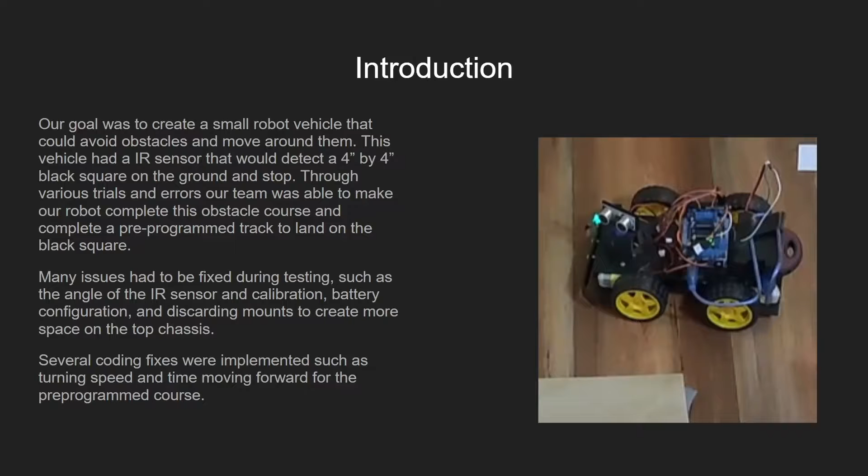Previous designs. These designs were made by Lawrence and illustrated by some of the visions our group had discussed in the beginning. One of the main questions we had was how many wheels would be enough. Not just how many wheels, but how many motors to drive them. For some reason, we decided on having 4 motors moving 4 wheels independently.

Our thinking was that 4 wheels would be better for moving the vehicle over the ramps. The design was pretty much the same as our final, in that it involved a lower and upper chassis with the electronics mounted on top. Later, a bumper pressure switch was added because through testing, the ultrasonic sensor seemed to not have a good field of view to measure.

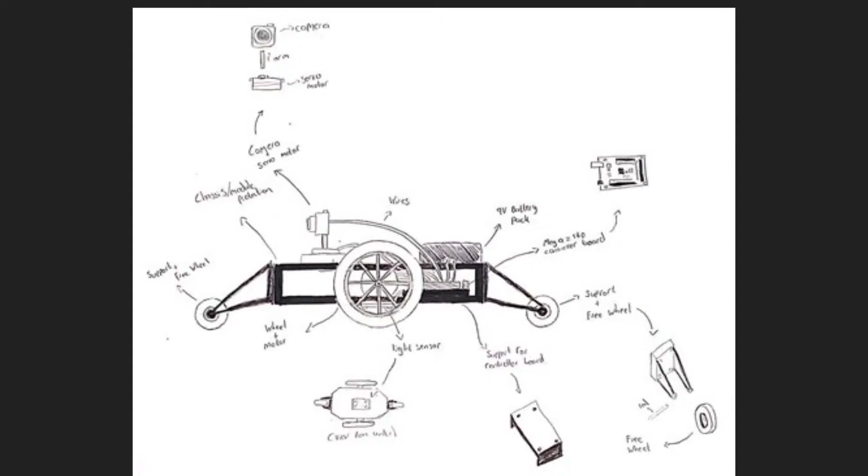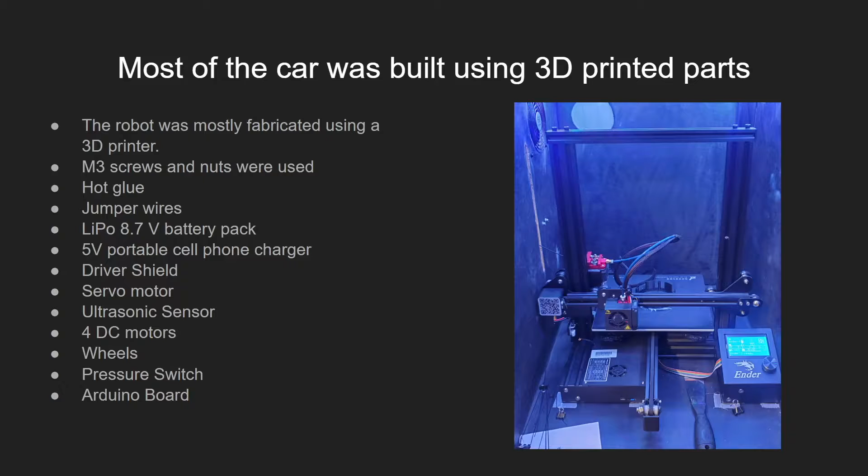Manufacturing plan. Our manufacturing was mostly done via 3D printing. We also used a lot of M3 screws, nuts, hot glue, jumper wires, a LiPo 8.7 volt battery pack, a 5 volt portable cell phone charger, a driver shield, a servo motor, an ultrasonic sensor, 4 DC motors, 4 wheels, a pressure switch, and of course the Arduino board.

SolidWorks renderings. In the beginning of the design process for the actual vehicle, the bottom chassis was made first. This would mount the wheels and the IR sensor would go in the front hole.

Although later during testing we discovered that our IR sensor needed to be placed in the very front of the vehicle, probably due to the fact that there was so little light that it couldn't detect the black square or detect when it wasn't on the black square.

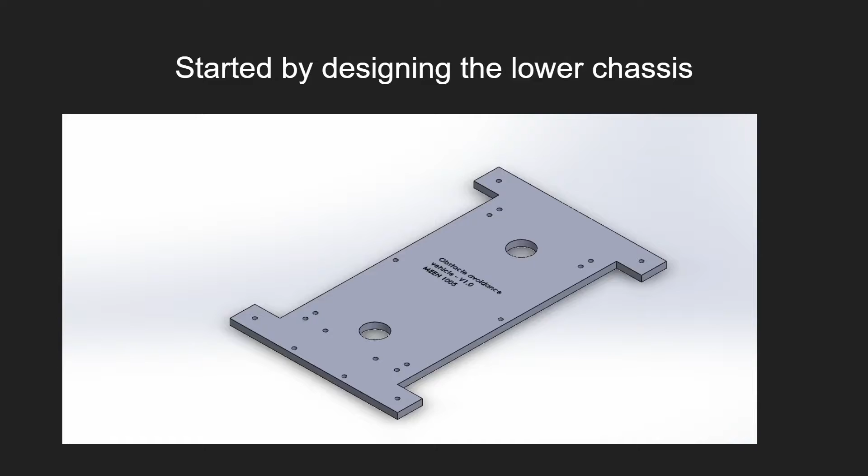Some components like the DC motors and the pressure sensor were quickly built in SolidWorks to help with the scaling of the model. Later, the pressure sensor switch was engineered, printed, and mounted.

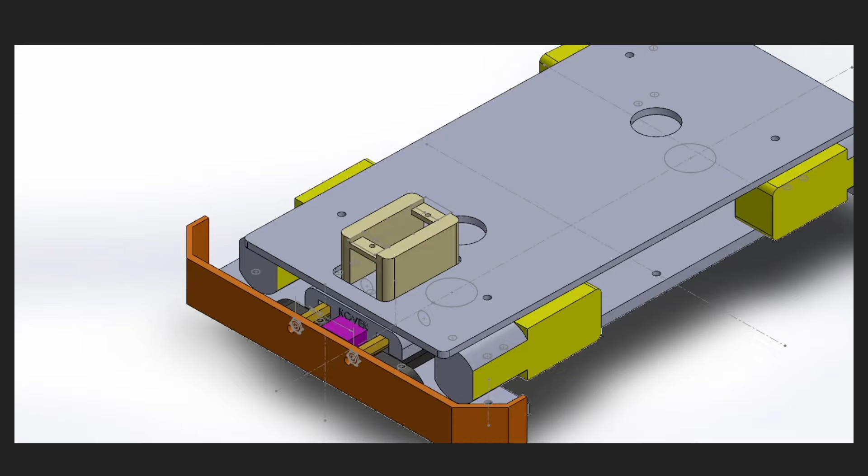The final step was to make the upper chassis and add component mounts. The servo motor fits snugly in the tan-colored mount on top of the chassis. Here's another rendering of the pressure switch mount.

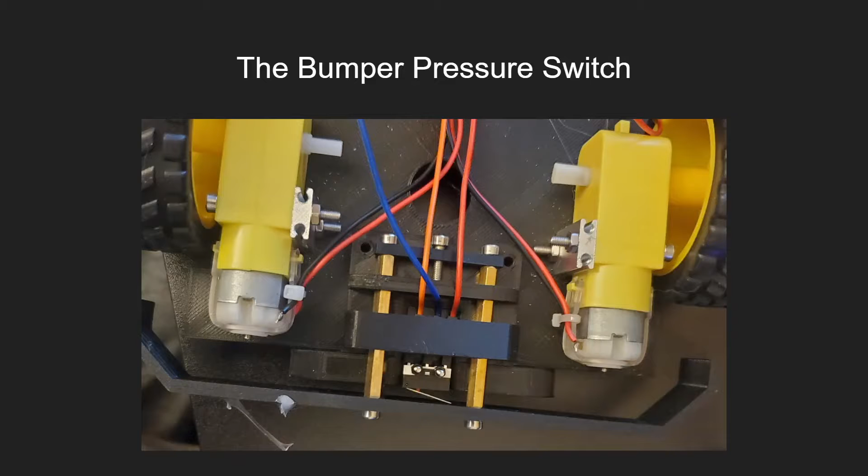Methods and design process. Here's a picture of the printed out pressure switch mount. It is a simple design which utilizes brass hexagon spacers threaded at 3 mm on each end. Those are attached to the front bumper, then screwed into a back plate.

This backplate is attached to an adjustable screw, just in case more room was needed between the front bumper and the pressure switch. The goal was to create a bumper that would push the switch at any time when running into any sized object at any angle.

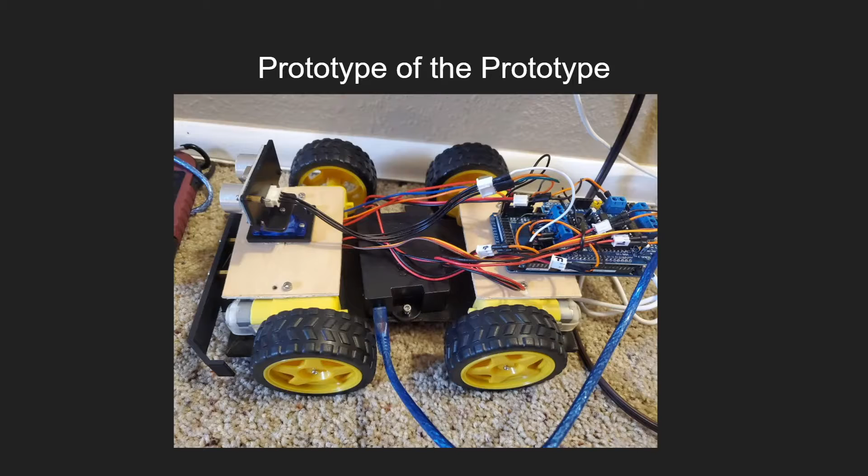The prototype phase had everything complete except for the top chassis. This helped with the wiring and also helped us discover the battery issues. We will cover these in a later slide.

For the top, we used balsa wood as a temporary top chassis and mounting bracket for the servo and the ultrasonic sensor.

To code the robot, each individual component was programmed separately. This allowed an understanding of how each program would work together with one another. The first component to be programmed was the DC motors. An individual program was written to make the motors move forward for a set time. Then we made a program to move backwards, move left, move right, and stop completely.

Next, the ultrasonic sensors and servo motors were programmed together. The serial monitor was utilized a lot for this. The rest of the components were later programmed, such as the pressure sensor and the IR sensor. Again, serial monitor was very helpful for this.

As stated before, there were many issues with the batteries. First, our driver shield seemed to be drawing a lot of current. When the Arduino board was plugged into the computer and the 8.7 volt battery plugged into the shield, the program ran perfectly and did exactly what was expected. When the Arduino board was unplugged from power, nothing happened. This led us to believe the Arduino board needed an extra power supply in order to work.

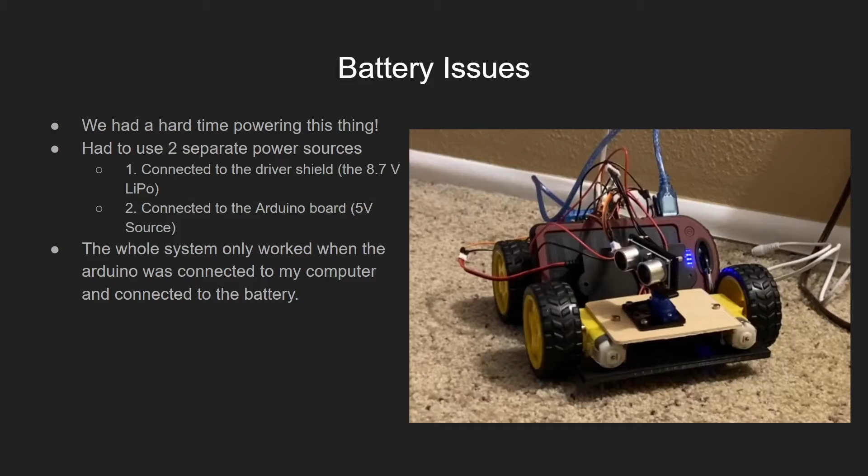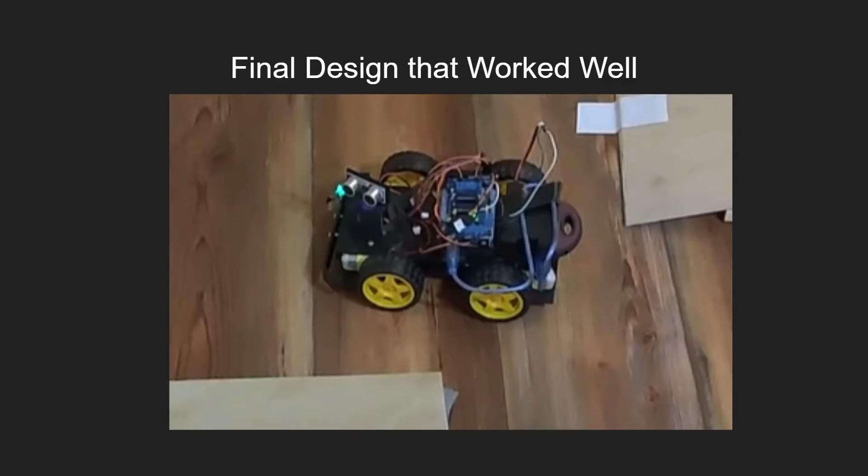Here is a photo of our final design. You can see on the back we have the cell phone battery, then the LiPo hobby battery, then the driver shield, and under the Arduino board. The ultrasonic sensor attached to the servo in front, and the pressure sensor bumper.

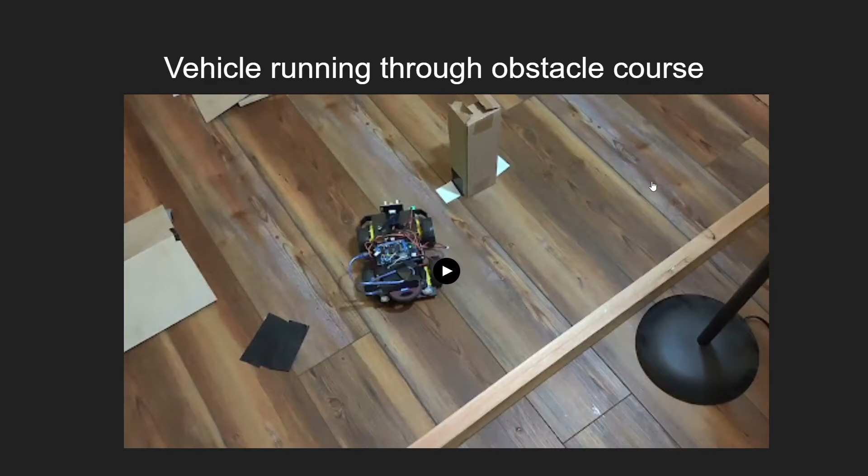Here's a video of our vehicle running through the obstacle course. This was after a lot of testing, so the ultrasonic sensor didn't scan all the time, it seemed, and we had to rely on the pressure sensor switch to be pushed. And sometimes it wouldn't even push it all the way. However, it did seem to do a good job in doing the left and right distance comparison and then choosing which direction to move into.

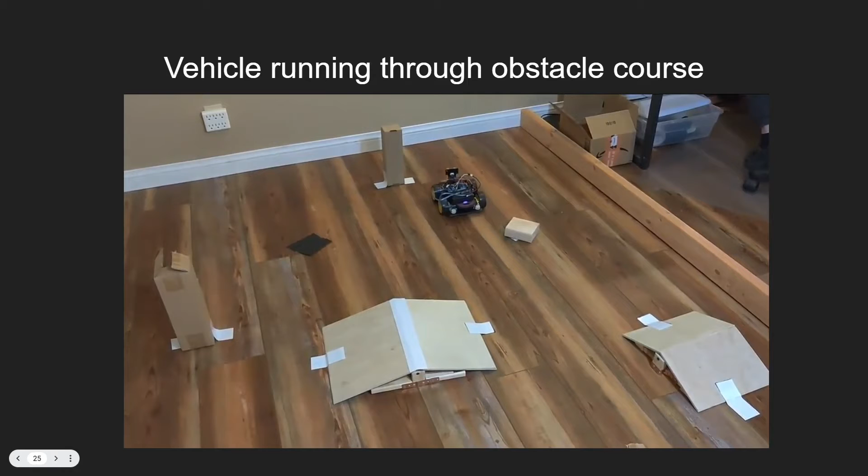It seemed to go over ramps pretty well. You can also see the green light. That green light is the IR sensor. As we discussed, it had to be attached to the front of the bumper because it just didn't work underneath the vehicle.

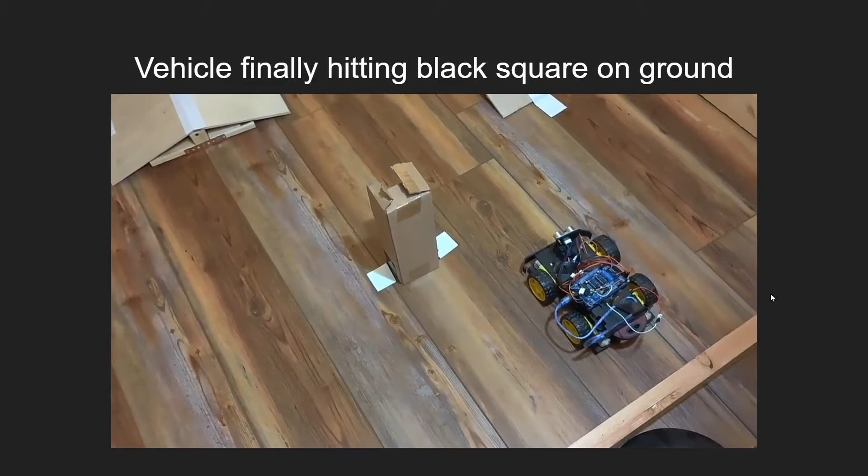Here's a video of the vehicle finally hitting a black square after several tests. It was getting pretty late into the night, so we were really hoping for it to eventually hit.

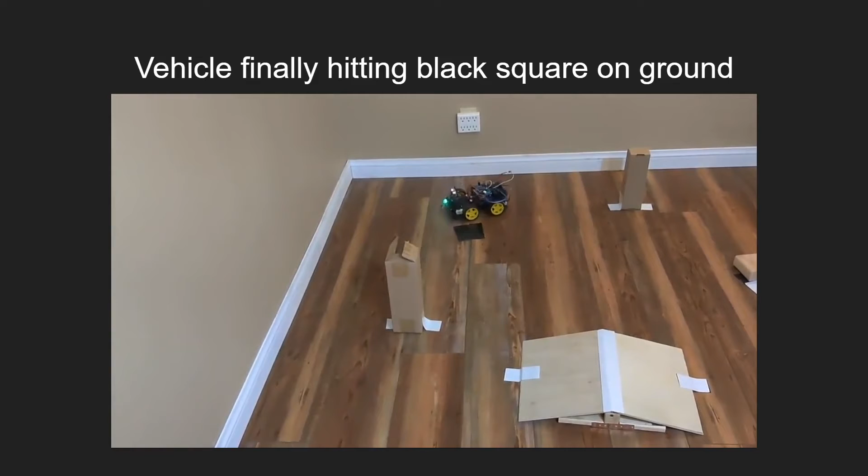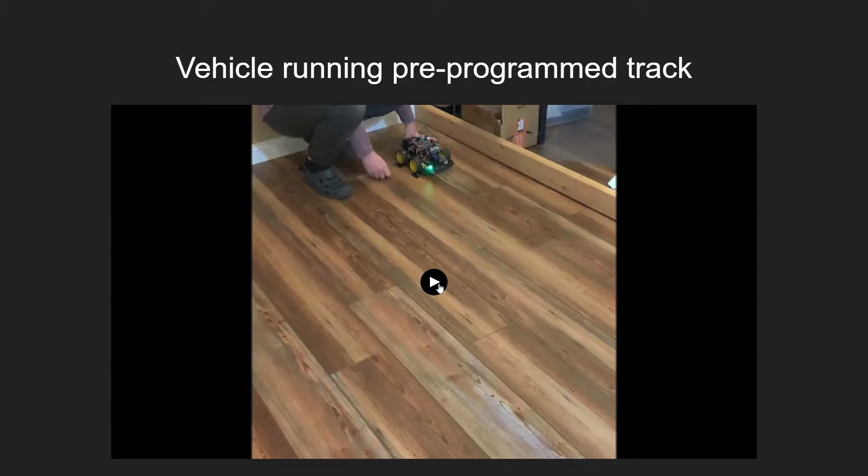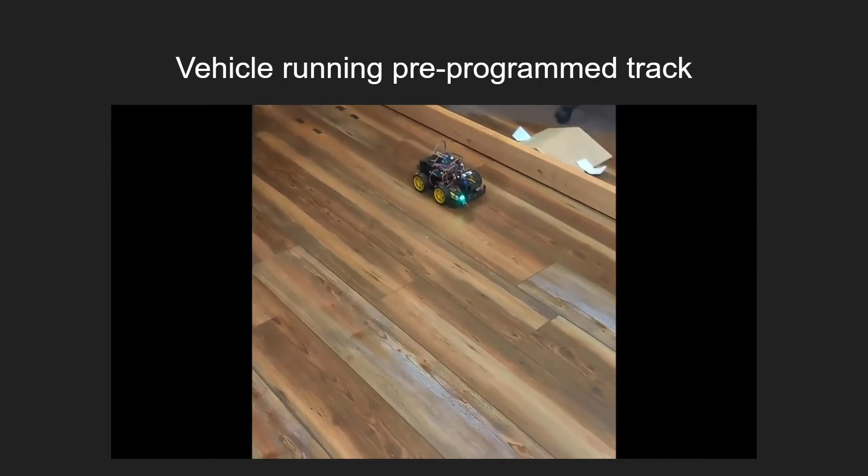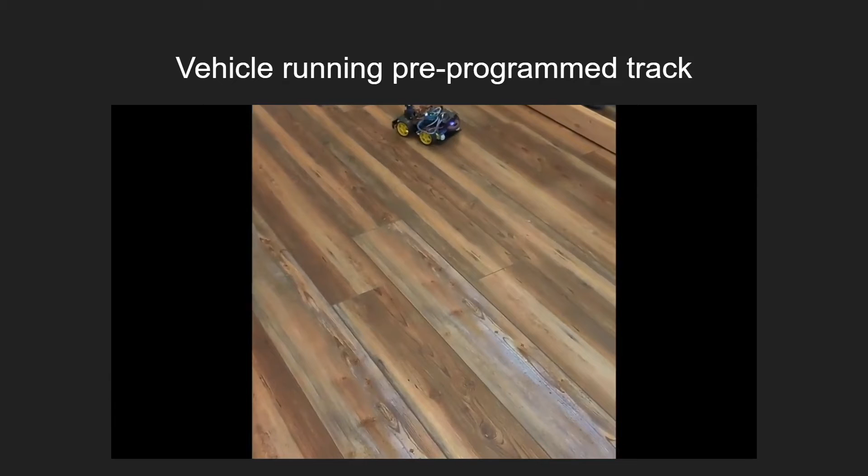Lastly, here is the vehicle running a pre-programmed track. And I'll just describe to you what the program was written to do. So after we press start, the vehicle runs for 3 seconds, turns right, runs for 3 seconds, turns right, runs for 2 seconds, turns right, runs for 1 second, turns left, and then it hits the black square. It did as it was intended.

What could be done differently? Next time, I think using 2 motors and 2 wheels would be better. Or sorry, using 2 motors and 4 wheels, or maybe 2 wheels and just 1 wheel on a swivel. Using 2 motors would draw less current from the system and give more to the other components.

From some online research, it turns out that the driver shield we were using is apparently very inefficient, and the transistors suck up a lot of energy and lose it to heat. A better driver or transistor system might be better. It would be awesome if there was a design that would only run on 1 power source, seeing as that using 2 batteries was very heavy and also quite annoying.

As stated before, the ultrasonic sensor didn't seem to run well. You could tell in the video that the pressure sensor was mostly utilized and not the ultrasonic sensor for obstacle avoidance. Lastly, more research is needed to be done to code for scanning the black square when inside the if statements and modes other than move forward.

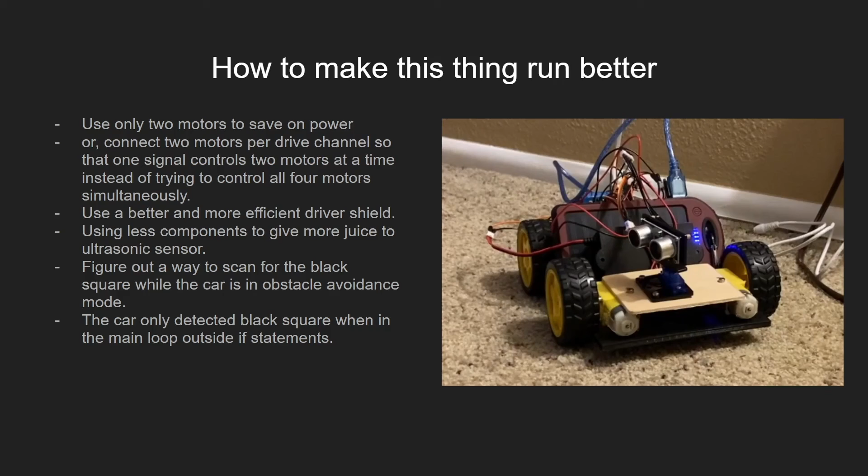Conclusion. We made a vehicle that mostly avoided obstacles and eventually found the black square. The many components were drawing so much power that the ultrasonic sensor was lacking. It was a very good thing that we had a pressure sensor bumper. Otherwise, our experiments might have failed completely. Power consumption seems to cause a lot of issues, so more research and development is needed for later projects. Thank you.